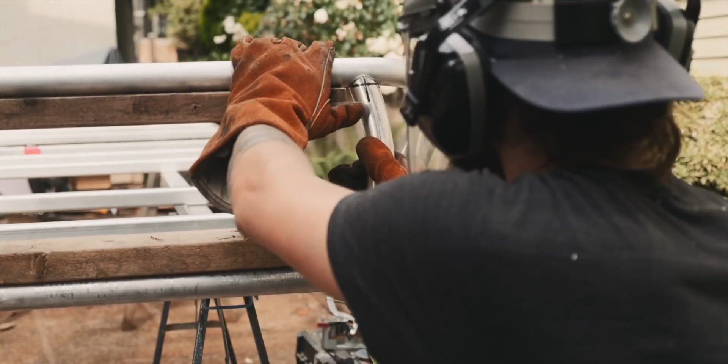Hey friend, have you wanted to learn how to weld? I think you should. I've picked up welding in the past couple of years, 3 years ago exactly, and it's my favorite skill set that I've developed time into learning, and I think it's a lot easier to get into than most people expect. At least that's been my experience. I was more intimidated about how difficult it might be and was pleasantly surprised how quickly I ended up making projects that I liked. We're gonna tackle a lot in this.

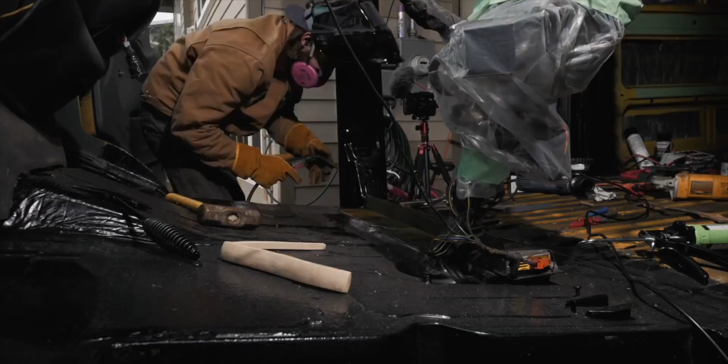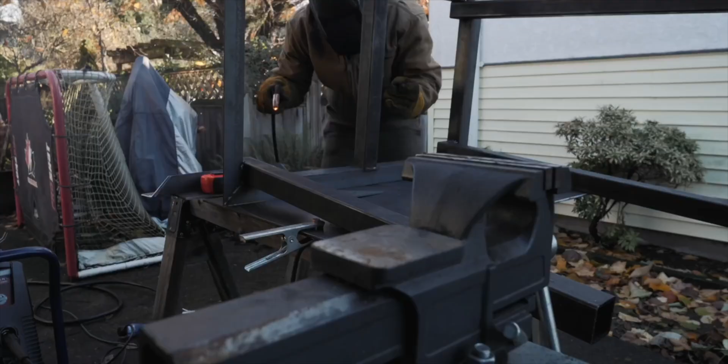And I always assumed that welding was really hard, and in order to get something functional, you needed years and decades of experience. Yes, pipeline, structural welds, those kinds of things, that craft is on a whole other level. Guys doing TIG welding, stainless, titanium, all those specialty kind of welds, yes, those are an absolute art form of a science that I respect so much, what those guys are doing in their knowledge.

But let me just be really blunt with you. Steel assembly with a Canadian Tire welder is easy. You get a bottle of gas, you get the right wire, you learn what the stuff means, you learn your settings, and assembling things with a little welder like that is very straightforward. You clean your material, cut your joints well. Steel welding is very straightforward.

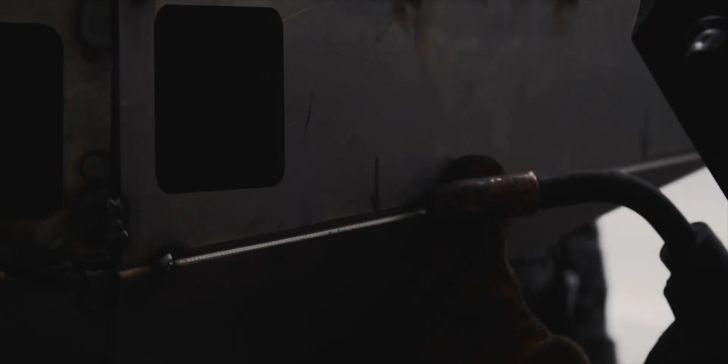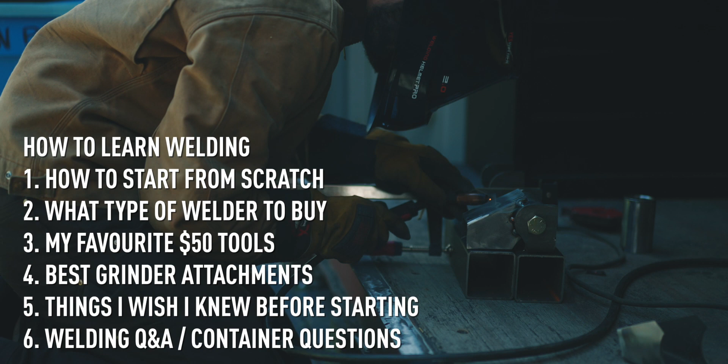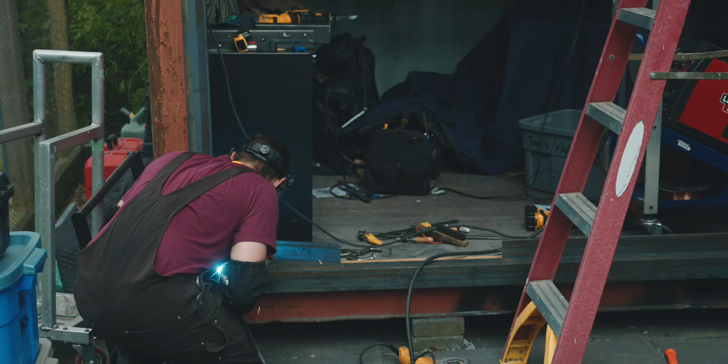So this video turned out to be pretty massive, and I'd love for you to use it as a choose your own adventure, to just jump around the different sections and chapters for whatever interests you, from the philosophy of how I approach learning how to weld, to what I think is the best welder to start on, to the little tools that I find very helpful that I wish I knew existed earlier. This is technically part 3 of a series of videos that we're making about the shipping container I will be continuing to convert into an off-the-grid capable shop.

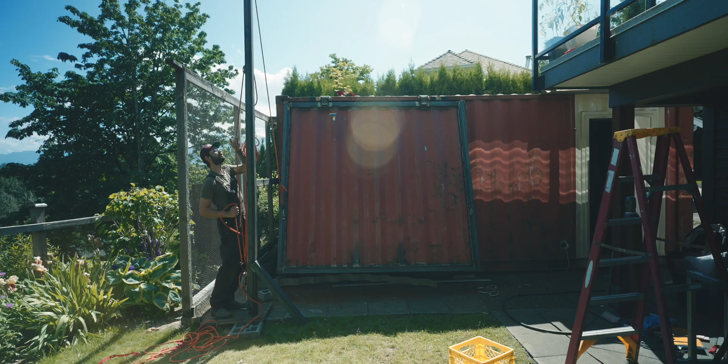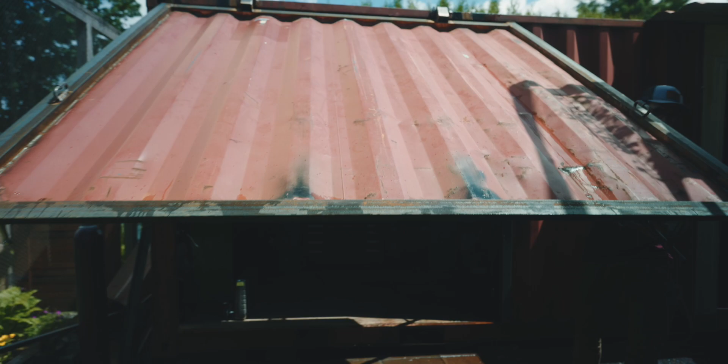If you're watching and you go, oh, that's not the right word or explanation, or there's a better way to be doing that, I can assure you this video is already way too simple for you, and you're further along than even I am, so don't worry about it. This video is not for you. And if you have any tips, please leave them in the comments, because those are always helpful. But again, I'm doing this from a beginner's perspective. I am not an expert.

The structure of this video is going to look like this. I'm going to talk through how to start, the exact tips that I would go through from not having a welder to laying your first bead. Then we'll cover a section on what type of welder I think is worth getting as a beginner that's going to grow with you for the different types of projects you may want to do.

I'll cover my favorite tools for under 50 bucks that have been really helpful for metalworking in general that I didn't really know existed, but I find super helpful. I'll then cover 7 things that I wish I knew before starting welding. This is kind of like more philosophy about how to approach learning. Then we go into a massive Q&A section addressing most of the questions that I've gotten so far on the container videos.

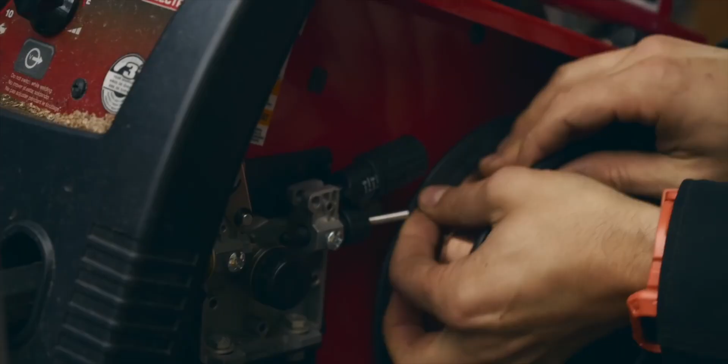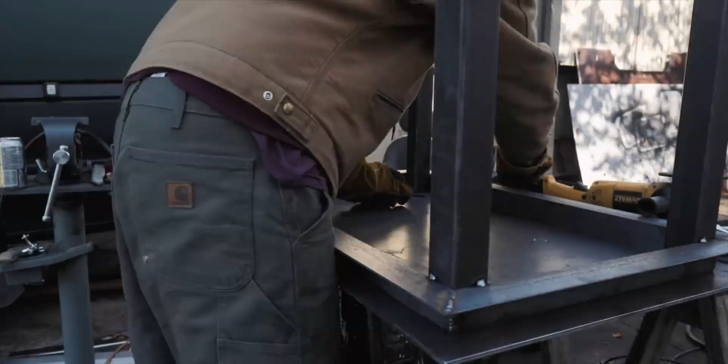So rapid fire off the top here, how would I get into welding if I've never welded before? Buy whatever welder you can get your hands on. More tips on that in a sec. Read the operational section of the manual so you know how to feed wire, work the machine, and change settings. Decide on the first project you want to build, like a table or a shelf. Buy the material and cut a bunch of practice sections to do testing on.

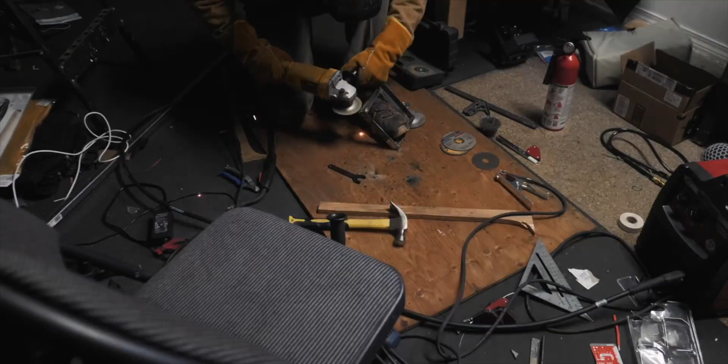Reference the chart with your machine as a starting point for the weld settings of the material you want to weld. Try to start welding. In about 30 to 50 minutes from buying the machine, you should be able to get something that resembles a weld happening.

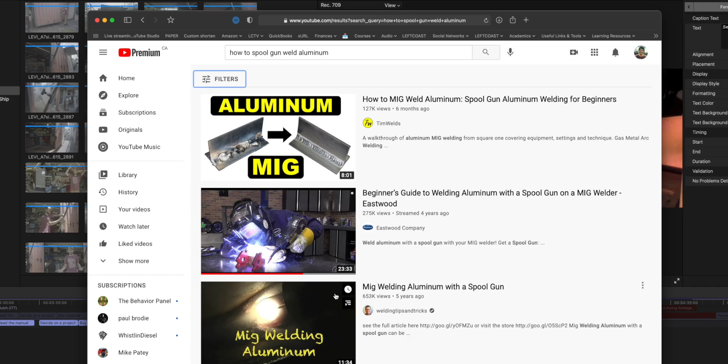See, look, this is my first weld. Then I would go to YouTube and watch welding videos that show you what the puddle of a weld looks like when you're welding different kinds of joints with a MIG welding setup. These videos are super helpful, often great explanations from really talented experts, but often filled with so much information that you only learn one or two things at a time.

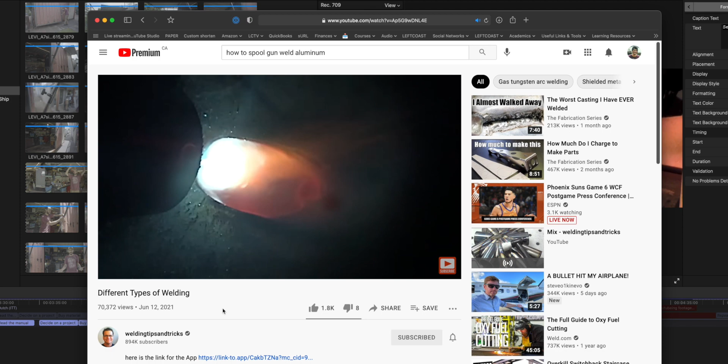Take the one or two things you learn back to your project, try laying some more weld. If you run into an issue, stop, Google the answer, try to find a solution, watch more videos, go back to your project, and eventually over time, if you rinse and repeat this back and forth, you will get closer and closer to a weld that's gonna be strong, and you should end up with the finished project.

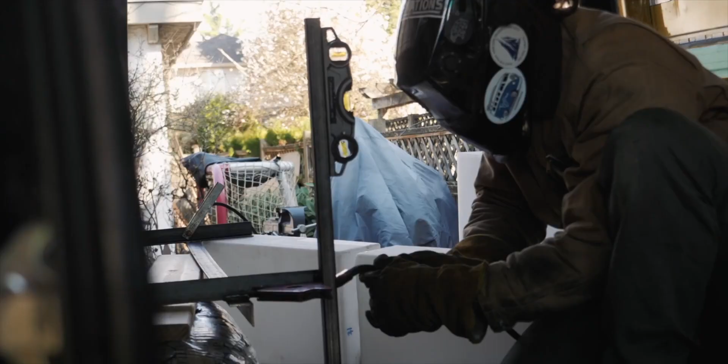Then repeat this process over and over with new projects, scaling up the size, trying different things, stretching your skill set, always searching for the answers to the things that you run into so that way you can learn more. And through all of this, I must say, respect the fact that you can get hurt in a lot of different ways if you're careless.

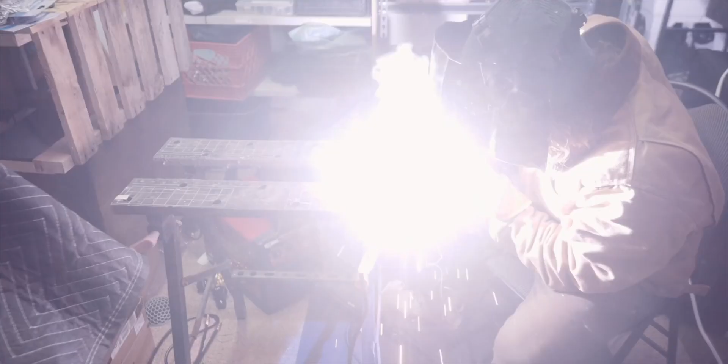Things are very hot. You're dealing with molten metal. There's lots of off gases. If you're using grinders, there's many ways to injure yourself. So respect it. Learn about the protective equipment that you would like to use, because there's just a lot of ways you can hurt yourself.

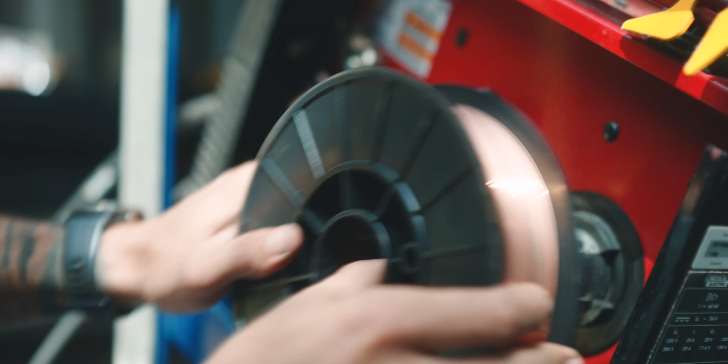From a beginner's perspective, the type of welding that I think is most straightforward and helpful to learn and will take you the furthest, I think you should learn MIG welding if you want to do steel assembly of projects like what you've seen me do on this channel. Wire feeds from inside the machine through the gun and meets where you're going to weld. So inside of here, there's a spool. It comes all the way down the hose and it comes out the end here.

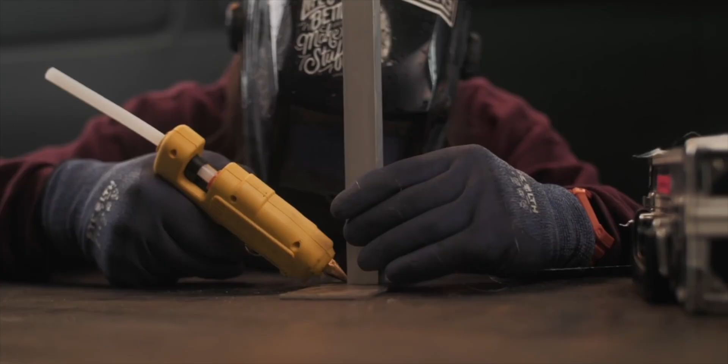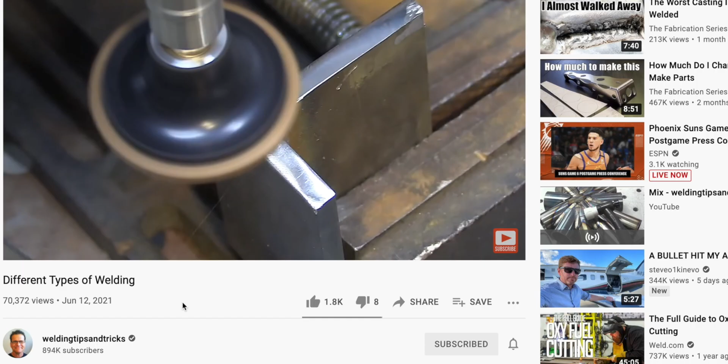Let me see if I can explain this in a simple way. When you hot glue, you're adding glue to the outside of two materials and you're sticking them together. Welding is not that. Where the wire is coming out, that is creating basically a molten reaction in your joint, and you're actually fusing the two pieces of material together. So don't think of the filler wire as just the thing that is gluing. The goal of welding is to penetrate into the two materials and fuse them together.

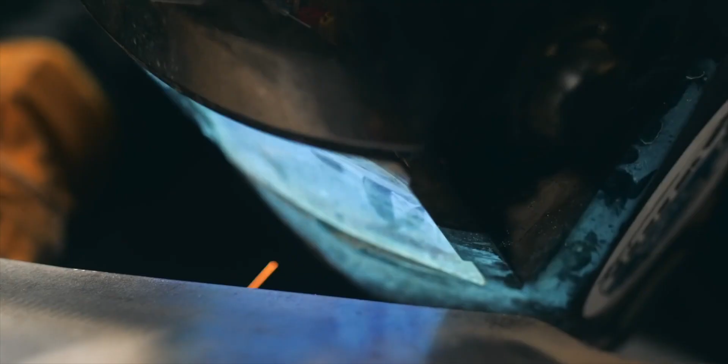But the process of MIG welding, where the wire is coming through here, allows you to learn it quickly. The intro level to learning it is very quick and you can get results fast. And then the ability to do larger projects expands with it. So all of this is assuming that the main thing you're wanting to weld together is just basic steel. That's called mild steel. This is just ordinary steel that you can get from a lot of different places, and it's one of the more common materials that people like me are trying to build together into things.

So welding together steel with MIG is what I strongly recommend, because the ease of use, the experience of it is awesome. I really enjoy MIG welding. It's quite an easy learning curve. You can go get a MIG welder from basically any hardware store. From $300 to $1,000 Canadian, you can get yourself a great machine that you can then add peripherals to make it do other types of processes.

So typically when you get a machine like this, it will come with spools of flux core wire. This wire that I have here doesn't have any shielding built onto it. What the shielding means is, where you're doing your reaction of the weld, at that site where you're fusing metals and making them molten, you need a gas protecting around that area so that it doesn't get oxidization and porosity. If there's no shielding over that delicate site, you're going to end up with a weld that is not strong, is easy to crack, doesn't fuse properly. That's not good. You don't want that.

So flux core is very straightforward. You can use it in windy environments. It's great, and you don't need gas to do it. So you can get started right away. That's a fine process to learn.

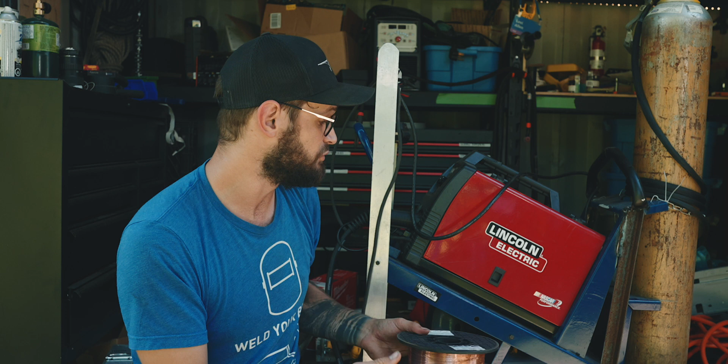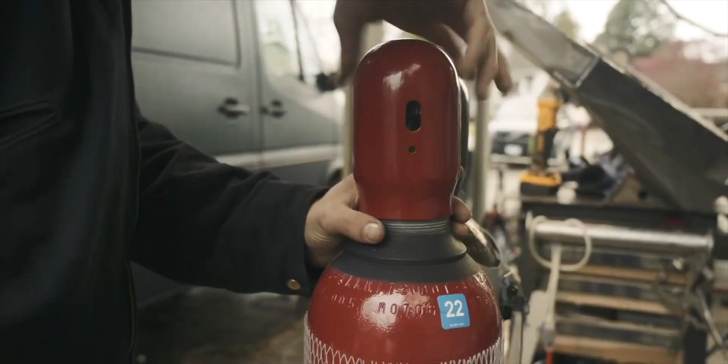It's great because deep penetration for your weld is straightforward with flux core. Flux core is fine. You might find yourself wanting to jump over to not doing flux core. Maybe you want welds that look a little cleaner or don't have as much slag on it, or for whatever reason. Jumping over to a gas bottle setup is what allows you to run other types of wire that don't have the shielding, the flux core built onto it.

I wish that I knew when I was getting into this that the wire I was going to be using most of the time is 035. I'm going to be welding mild steel. And if I get into a gas, basically I just need the argon CO2 mix for welding mild steel with MIG. And you hook that up to your system and you get a welder going that is pretty capable for doing a lot of different projects.

And you can get started without the investment into gas bottles for a lot cheaper. But if you buy a welder that is able to do shielding gas, like it's got the hookup for it, it opens up a lot of flexibility. And yes, there are more expensive machines, these multi-process machines that can actually do TIG welding as well, and these other types of welding where you're adding filler rod or you want to do stick.

And if you want to go the route where you eventually learn TIG welding, which is able to do a lot more specialty applications in metal types, it might be worth it actually to learn stick welding first, because that has a higher entry level of difficulty. But once you learn puddle control with stick, it makes TIG welding tons easier. But if all of that is just not in your wheelhouse, don't worry about it.

I recommend going the MIG route with flux core, getting a bottle of gas. Any cheap welder from any department store is going to do just fine. I don't know, read some reviews online, but basically anything that you end up buying, I think is going to be fine. Just be aware of its limitations if you're trying to go to thicker materials.

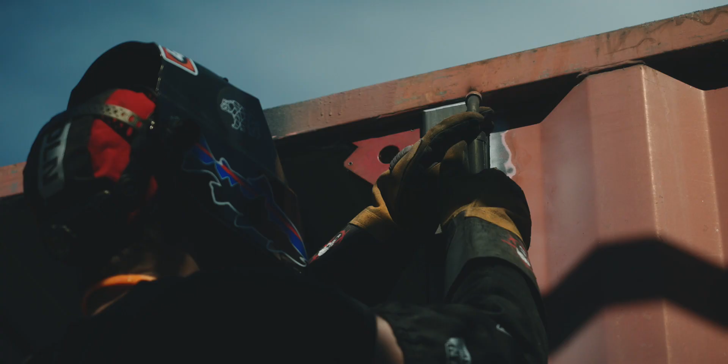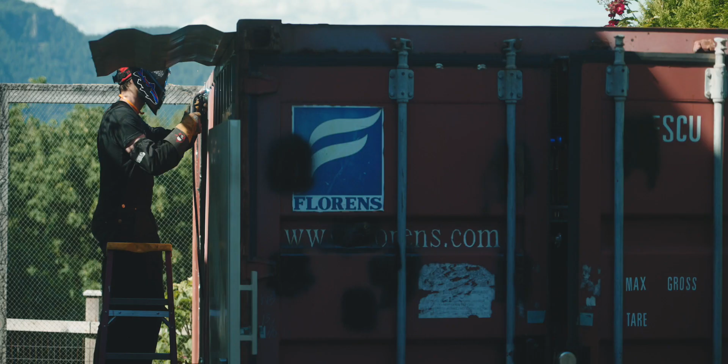Jumping over to 240 volt, that's going to allow you to do thicker metals because you can run a higher heat weld because it's got more power available. It's not just going off a 15 amp 110 circuit. You can get just a 110 welder, and that's gonna be able to do a lot of projects, and maybe that's just fine for you. But be aware of the limitations on material thickness.

So research whatever model you're considering buying and just try to figure out what's the thickest I can weld with that machine and the wire size that I can put into it. And if that's not as thick as you want to go, jumping up to a 240 volt welder is great. And I specifically went to this model because it was spool gun capable. This is still what's considered a hobby level machine.

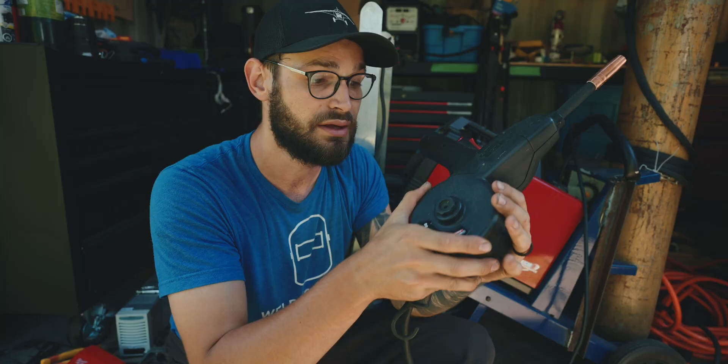So the quality of spool gun you can buy, you're limited to because of the types of connections that are on it. But the reason why you want a spool gun is for welding aluminum. Spool gun aluminum isn't my favorite way to do aluminum, but it's the lowest barrier to entry, especially when you're using shielding gas. And the reason why you need to use a spool gun when doing MIG aluminum and you don't have a push-pull machine is because aluminum filler wire is so soft.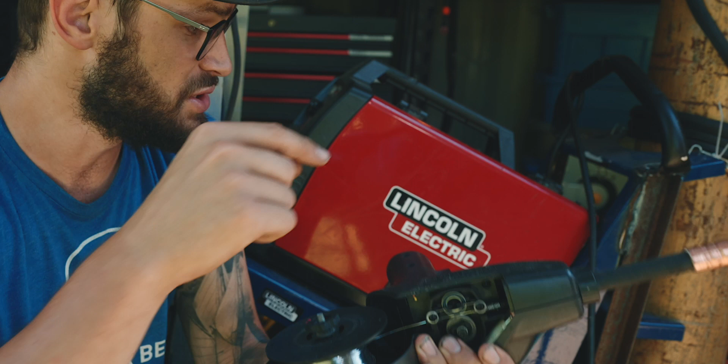So running it down the whole hose to your point of weld, that's not going to go well if you're not using a spool gun. So like this, the spool is super close to where your weld is going, so it doesn't have much distance to travel. It's not pushing it or pulling it very far. And this is what gets you in the aluminum game.

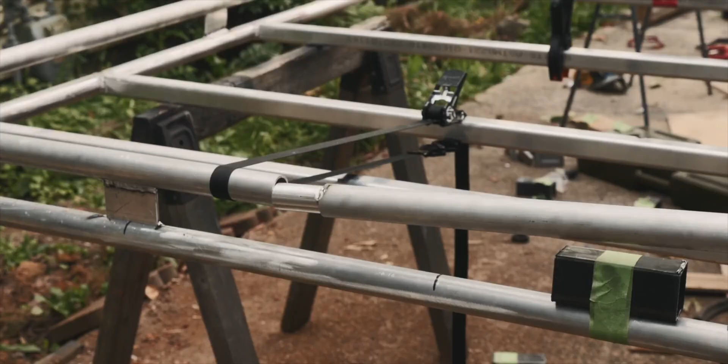And you can buy different spool guns for different types of machines, but it just so happens that the cheaper Lincoln machines are capable with the 100 SG spool gun Magnum. It's fine. It leaves a lot to be desired. It's expensive. It was like $500 and it's a lot of plastic.

But this is what got me into the aluminum game, so that way I could do my roof rack build and other things like that. And aluminum is quite enjoyable to work with, as far as the fact that you can use your standard woodworking tools to cut it, to manipulate it.

It's nice and soft. It's light. I love aluminum. Welding it is difficult, but I got this specific machine because I could attach this spool gun and get into the aluminum game. And that's kind of what's required to do that.

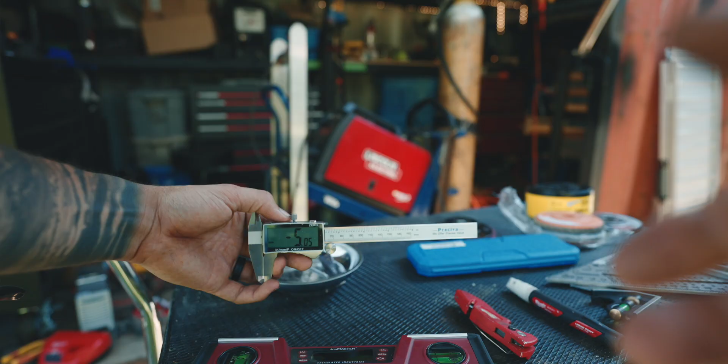I want to quickly address some of the most useful items that I didn't know existed that have really helped me. The one that I want to start with is a digital caliper that shows you fractions. I don't think in fractions very well because I'm not a carpenter, I'm not a metal worker, and I haven't lived in that world my whole life. And so when someone says that a material is 5/16, my brain has a very challenging time immediately visualizing what that thickness is.

And so when you walk into a store and you say, hey, I need 4 feet of this kind of steel, and they go, what thickness? And you're like, crap, I only thought dimensionally. That's a good time to ask them, well, hey, what thickness do you recommend? And then they'll ask you some more. That's a great time to ask a question.

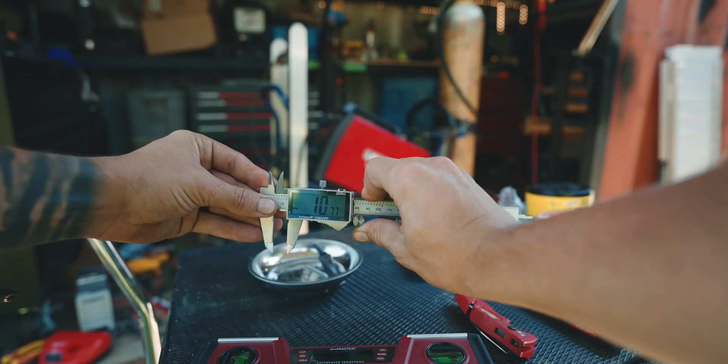But also having this digital caliper, this is just a cheap one from Amazon. It can switch between millimeters, inches, and fractions. And this is so helpful for me, especially when I'm ordering parts and I see the measurements online and I'm like, what thickness is that?

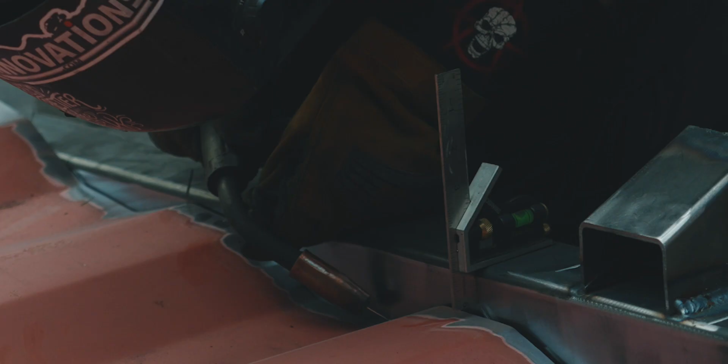Next piece that I'm really happy with is this really small combination square. I use this all the time. It just lives in my pocket. Because it has the oversized edge, it can sit nicely up on a piece of material for marking it out, measuring thicknesses and depths of things by setting it on something. This gets used all the time.

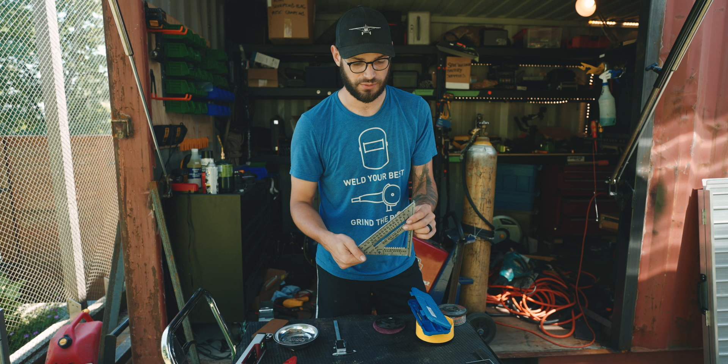I love this. Another really helpful measuring tool is just a metal speed square. This is really quick for doing lines, for cutting. It's metal, so if you're working with hot material, it doesn't melt and that kind of thing, and it can get knocked around a little bit and it's gonna be fine. But a digital torpedo level is really helpful. This is magnetic, so it attaches to the material. It'll show me a digital number, either right side up or upside down.

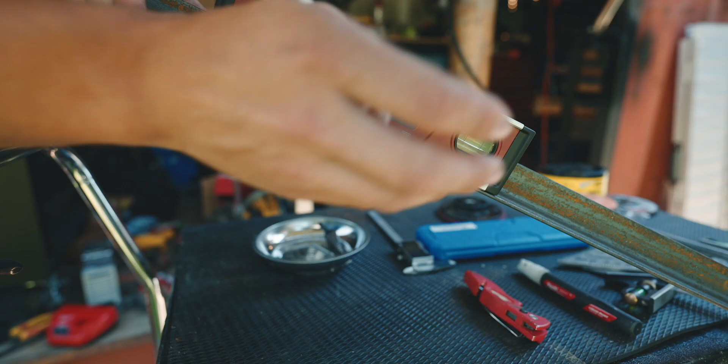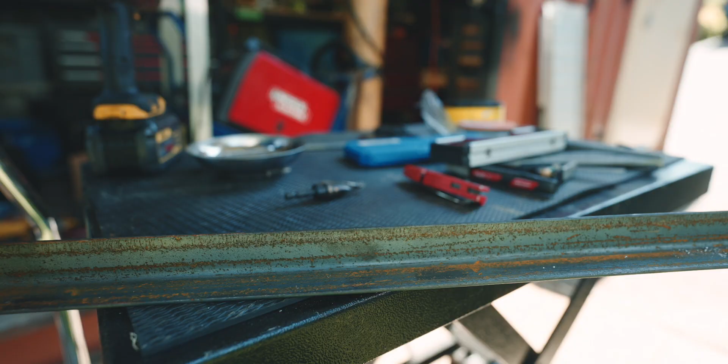Moving to drill bits. A spotting bit is amazing for metalwork. It's like a 45-degree angle and it's very sharp. It's not actually meant for making a hole. What it is meant for is marking where you're going to start drilling with another kind of bit. And it's very easy to hold it in place on the material and it doesn't wander. So I use these all the time for where I'm going to start my hole instead of using a punch. And this is just so invaluable. We use this all the time on the van project.

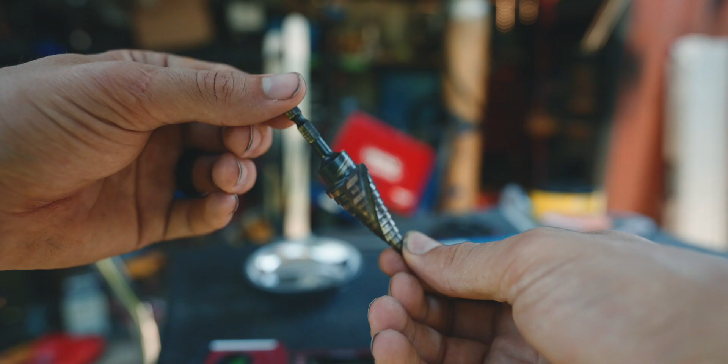Massive stepping bits. So it's got the wider diameter as you drill through your hole. I use this all the time. I really like the Milwaukee ones, especially with the hex shank. They're kind of expensive, but they're worth it. The Milwaukee ones have been my favorite, and they make making holes in metal so much easier, so you don't have to keep swapping your drill bit as you keep going bigger. Stepping bits, amazing.

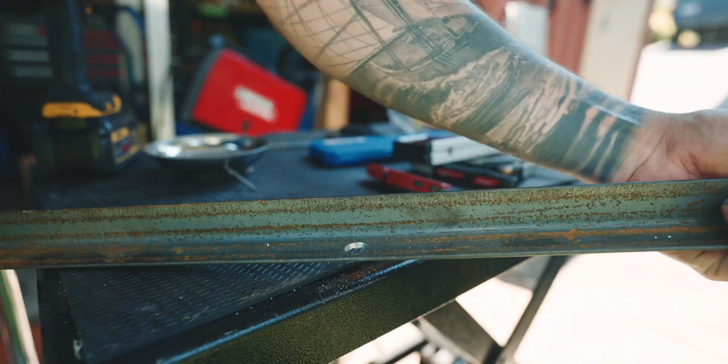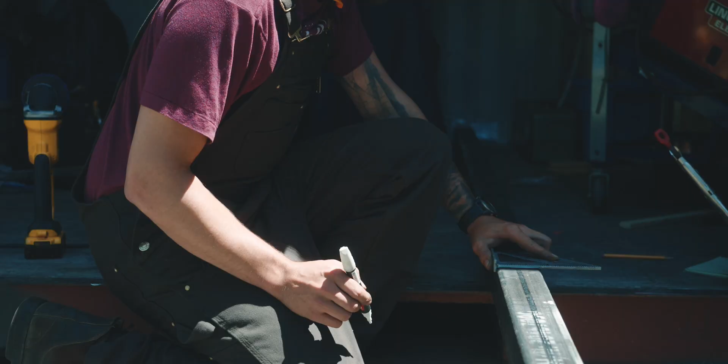For marking lines, I use an X-Acto knife. So this is just a Milwaukee fastback kind of open version. I like this because it's easy to swap out the blades because you are dulling them out if you're using them right on steel. But I'll just hold it right up to my square, come down it, and it'll mark on steel or aluminum, no problem. These paint pens, sometimes they're frustrating, but they do work well on metal. So having paint pens around is fantastic for marking out where you're going to cut.

I also find you can never have enough of these magnetic dishes for putting bits and things and doodads in, especially if you're disassembling something and you're not wanting to lose bolts. These are great.

Watching videos in other people's shops, especially before I got into metalworking myself, I never knew why they had so many grinders around. I'm like, don't you just swap the disc with the tool? Like what's the point of having that many grinders? And it's hard to describe the sheer quality of life you feel when you have several grinders for the different purposes. So as you're working through your project, you can just move from one grinder to the other.

The speed that it saves you, the joy that you feel. I'm of the opinion now that you can never have too many grinders because they are so massively helpful. When you don't got to friggin' fart around changing the wheels mid-project, it gives you an enormous sense of well-being. Grinder and paint makes me the welder I ain't. I don't think I knew how much I would be using a handheld grinder.

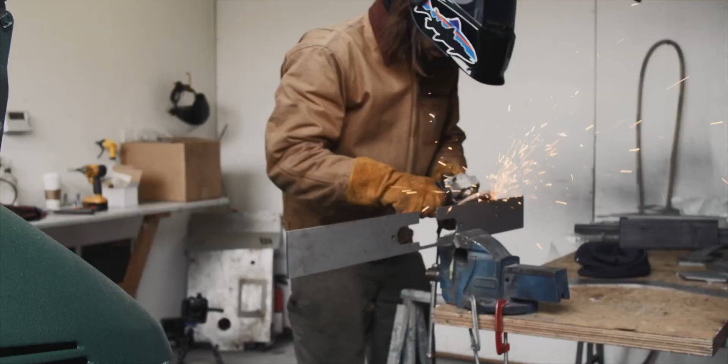They're indispensable in metalwork. I didn't know, and this is because I was a beginner, I didn't know that people used any kind of sanding tools on metal. But flap discs was what I was introduced to by Brandon from Coastal Off-Road when I was finishing my bumper build to get that nice smooth finish. And a flap disc is just worth its weight in gold. This is the most used device on a grinder when I'm working on a welding project.

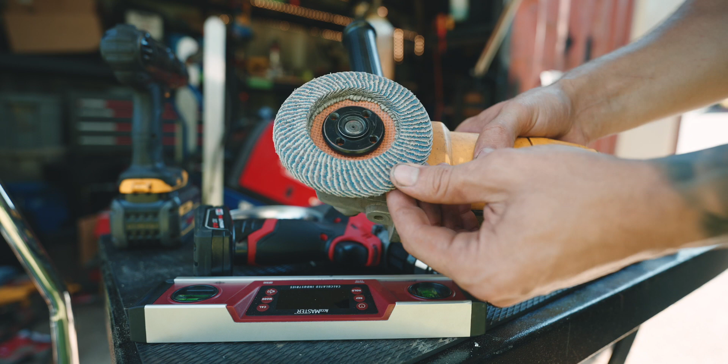I thought these big chunky abrasive discs that were just always on the grinder growing up, I thought this is what guys use for metalwork, and I could never figure out how they got smooth finishes on their material and why mine always looked so bad. I rarely use these big thick guys except for massive welds that I'm trying to smooth down quickly, but then I stop before I get all the way down and I come by with a flap disc like this. When a flap disc is well used, it starts getting a nice rounded shape to it.

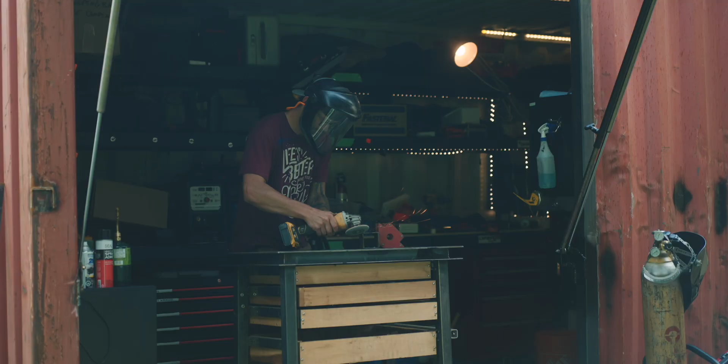And that's fantastic for notching tubing, for getting in there and making that nice smooth curve. It's really nice for beveling edges. So when you want to get a nice curved radius on a piece of steel, I really like flap discs. I buy these in 40 and 80 grit for different types of finishing, but I really like these all steel Walter ones, especially the kind that aren't thread on. I like it where the shank goes through and you actually clamp it down. When they're plastic and they're thread on, it is easy to break them off. This brand is my favorite. I buy these in counts of 10.

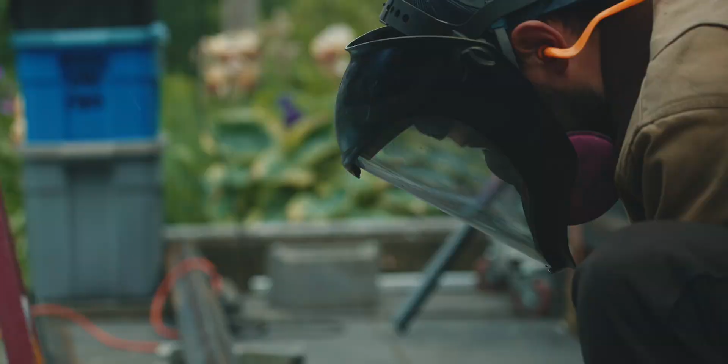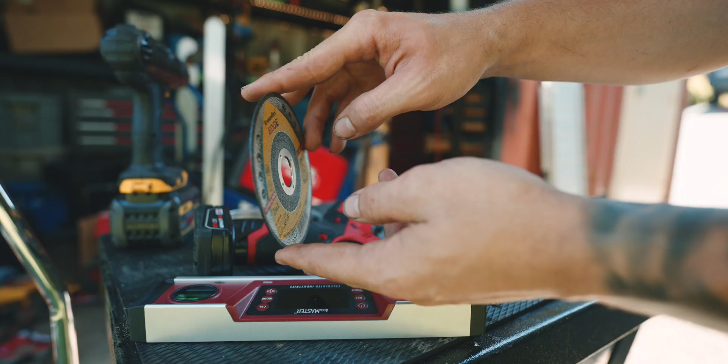These are 80 grit. Zip discs are my other most used disc on a grinder for cutting material. They're very thin, but they work amazingly well; it's like a hot knife through butter, cutting steel with them. I get the 4-inch and the 5-inch ones. These do explode. So all abrasive discs, all discs on a grinder can explode. So it's a good practice to off-center grind, like move your face away from where you're grinding. Having a guard on is wise a lot of the time.

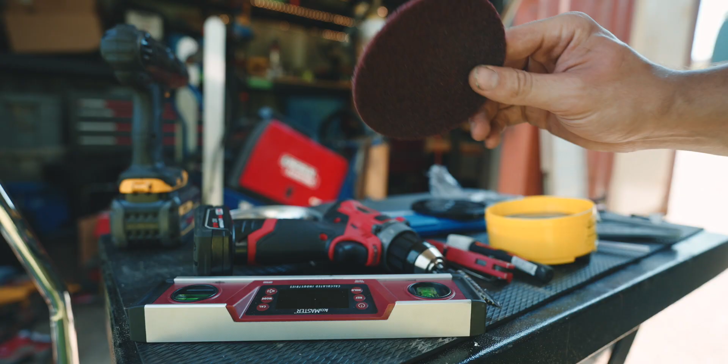For finishing, using a 3M Scotch-Brite pad with a plastic holder on a grinder. This is an amazing way to just finish and prep things for painting, cleaning, removing mill scale. I had no idea Scotch-Brite pads were even a thing on grinders, but they are so massively helpful for metal cleaning and prep and kind of just finishing off the look of your project. So getting into Scotch-Brite is a massive improvement.

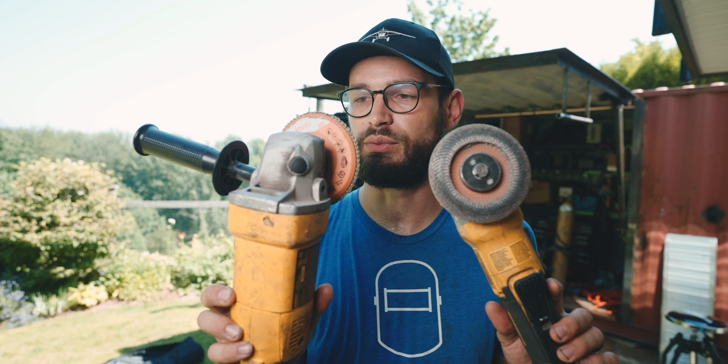I recommend starting with 2 grinders. One that's a heavier duty, higher amperage corded grinder for when you need to remove a lot of material from your welds, or you're working on a lot of steel stuff and you just need to do a lot of grinding. The higher amperage is going to just be better for heavier use applications, and because it's corded, it won't run out. And then I really, really like having a battery operated grinder for quick stuff.

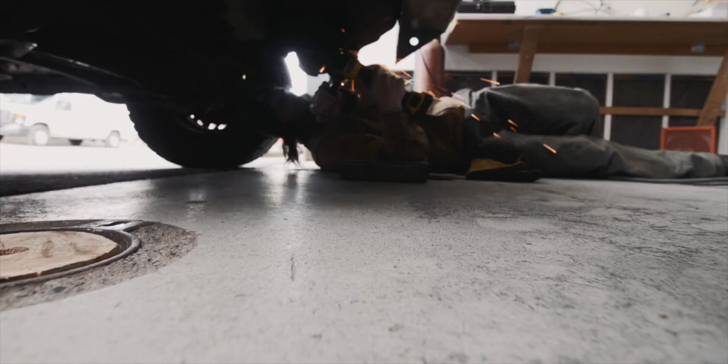This DeWalt XR one is nice because it's got a brake built in. So when you use it, by the time you're going to set it down, it's already stopped spinning. So I really appreciate that. You don't have to buy DeWalt. Just any battery operated one is helpful. Just be mindful that the battery is going to run out so you can't use it for long jobs.

I didn't actually intend to end up with this many grinders. I got these from an auction house for businesses that basically went bankrupt or closed or whatever. And you can find stuff on auction and get it really cheap. So I was after these large batteries because they just have higher capacity. And getting a set of these batteries, grinders came with it. So I started with one cordless and one corded, and now I have basically 4 grinders. The flap disc I use all the time for smoothing down the welds, getting 45-degree angles on it when I'm prepping a joint to be welded.

This guy right here is a new disc to me, but it's primarily for removing paint without much of the metal material. So that's kind of nice, because even if you use a sanding flap disc and you're using that to remove paint, paint will get clogged up in the flap disc. And also, if you remove too much, then you start to take away your actual material.

So I like these guys right here. It's actually very functional. I'm quite pleased. I bought a 4 set, and I'll definitely be buying more of these for just removing exterior paint.

The first main thing that I wish that I had known before I got into welding was I'd spent a lot of time researching how to get around welding. Maybe you've done something similar, like how to weld aluminum on the cheap without a welder. If you've found yourself running into how to find shortcuts around welding, I personally wish that I had realized sooner I should probably tackle learning how to weld.

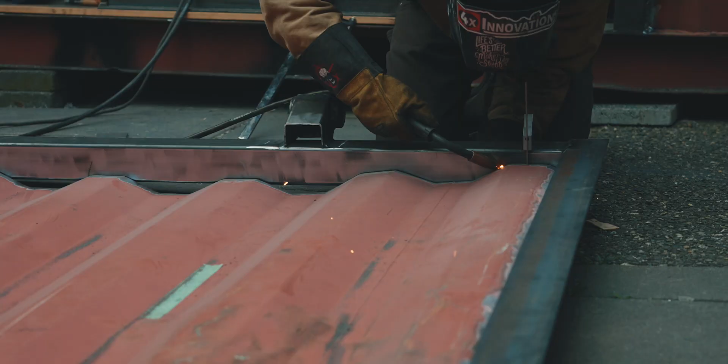And now that I have started, I'm finding all these different ways to use welding in projects to make them better. And it's just one of those things that if you're trying to find shortcuts around welding, you're probably the kind of person that should go out and buy a cheap welder and start welding, because it's easier than you might expect to get usable results quickly.

Lesson number 2, just because I'm not going to be an expert at it overnight, or maybe even ever an expert, that doesn't mean there isn't lots of benefits from becoming a beginner. I think that's the beauty of metalwork. Being a beginner at it yields a lot of positive results.

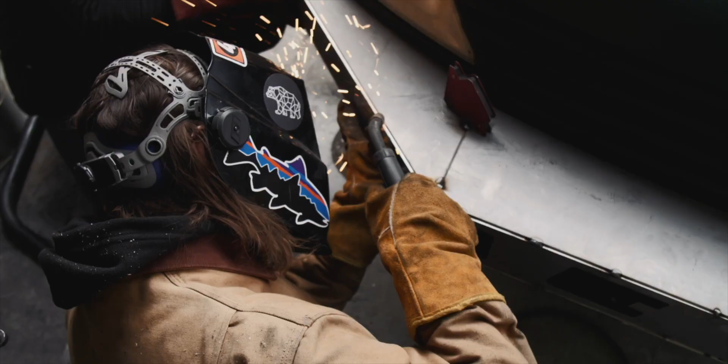And metalworking is this thing where it's like a mixture of chemistry, physics, engineering, and just elbow grease to finish a project. And the problem is that there's so many things that you can learn. There's an unlimited ceiling of things to specialize in and to get more knowledgeable about in different processes. And that can be intimidating, because then you think it's not even worth starting.

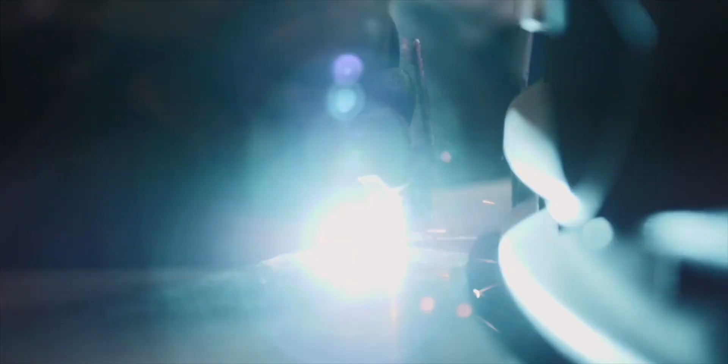But I think of it kind of like, if I haven't gone out and done a wilderness first aid course, or if I'm not going to med school to be a doctor, is it not worth then me learning how to properly care for a small wound? It's one of those things, right, where learning how to self-care a small wound is a really beneficial skill set. You don't need a wilderness first aid course to do it.

You don't need to be a doctor, and the amount of benefit that you can experience immediately from proper wound care on yourself is immense. So that's kind of my philosophy around metalworking.

So that leads us nicely into thing number 3, and that is, if you're gonna get into welding, if you're gonna go to a department store and buy a quick little welder to start with, if you're gonna go down that road, embrace not knowing. And what I mean by this is, okay, so this is multifaceted. The local welding supply shop is going to be way more of a friend than you'd ever expect.

So in most towns, if there's shops, if there's things getting built, which is most places in continental North America, unless you live out in the boonies, there's going to be a welding supply store, a place that you can fill up or exchange bottles of gas. And where you exchange bottles of gas, there's often welding supplies like nozzles, tips, wire, those kinds of things.

I would recommend, if you're going to go out and buy a welder, before you even do that, go to some of these shops. In your area, there might be 3 to 5 of them. Show up there, walk up to the counter, don't go during the busiest hours, and express where you're at in your journey. Say, hey, I'm just getting into welding. This is what I want to do with it. What advice do you have for me as far as bottle ownership, the process of getting into welding?

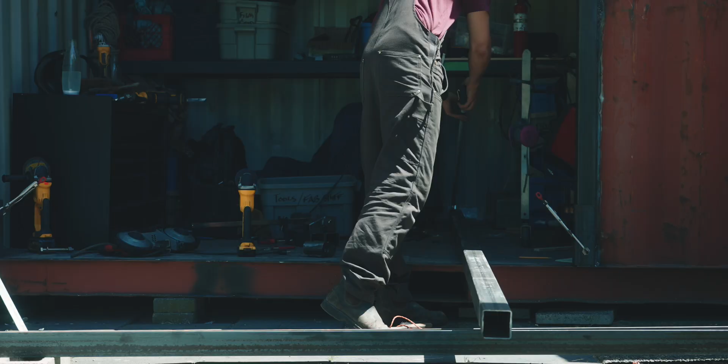Lesson number 4 is a lesson that I'm still learning painfully. And it's just that so much of building things out of metal is the measuring, cutting, and designing. That is a vast majority of what's going to end up with a final result that is good. So when you're getting into it, it's a good first project to try and make like a cart for your welder, or a bottle holder, or a table to weld on. Those are good first projects.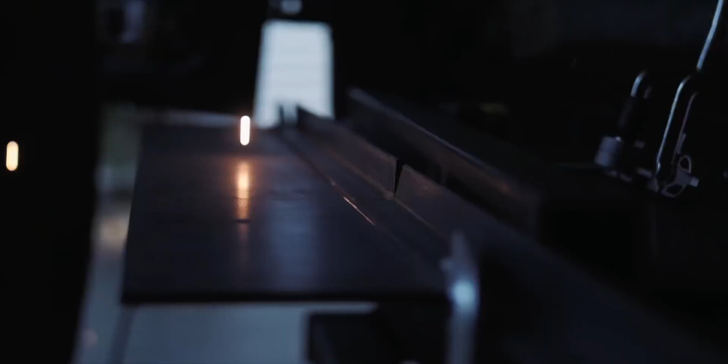And the thing is that you're wanting to weld because you're learning how to weld. And so I recommend cutting tons of pieces of metal to lay beads on and actually practice the process of welding, because you need to spend a lot of time on your machine to get used to it and how it behaves and the sounds to listen to. More on settings and stuff later. I'll talk about that in a sec. But you expect, because you're learning how to weld, so much of what you're doing with metalworking will be welding, but that's such a small fraction of what makes a successful project.

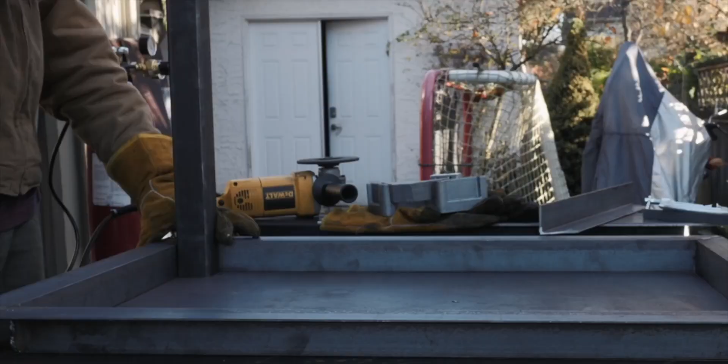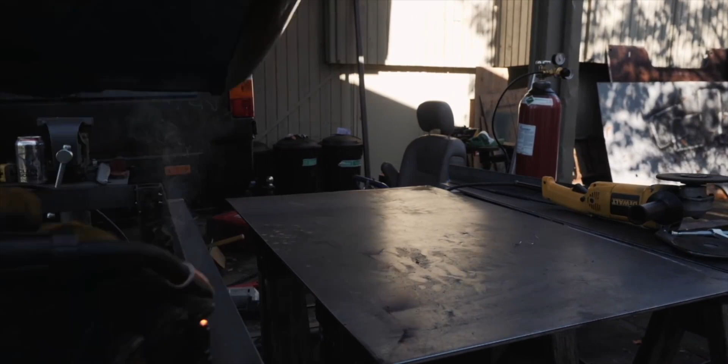And let's say your weld quality is only 3 out of 10 or something. You can get a functional built thing with a 3 out of 10 quality weld. You don't need a perfect weld if you're not doing some structural specialty application. You can have porosity in your weld on your table and it's still gonna hold together, and that's okay. And that's where so much of what makes a nice finished product in the fab cobbling world, where you're just kind of throwing things together on a whim and figuring it out as you go, comes down to the attention to detail with the cutting, with the measuring. So refining those skill sets and being patient.

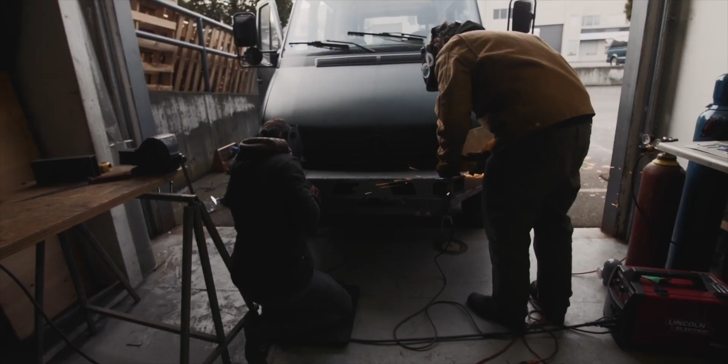In the learning process, there's an urgency to go quickly, and there's a standard of how you want things built that seems way higher than you're capable of. And somewhere in the middle there, you've got to arrive at projects that you can tackle to get that forward momentum and to kind of taste that addictive feeling of accomplishment when you're done something. But I can't recommend enough spending more time thinking through design, measuring well, cutting well, all of those things. If you slow down in that process and really just embrace that that's a majority of metalworking, you're going to have a better experience overall.

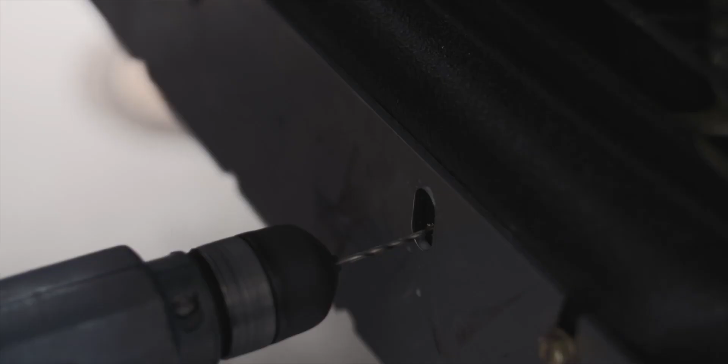Okay, the 5th thing is one that I feel that I was proved right with the process of learning metalworking, and that is embrace your learning style and just press into it. So for me, I'm a mixture of asking tons of questions of someone that's in person with me. So I love that tactile experience of a real human that's right there that I ask questions of, hands-on experience, and then deep diving to resources that are available online. So that's kind of my mixture.

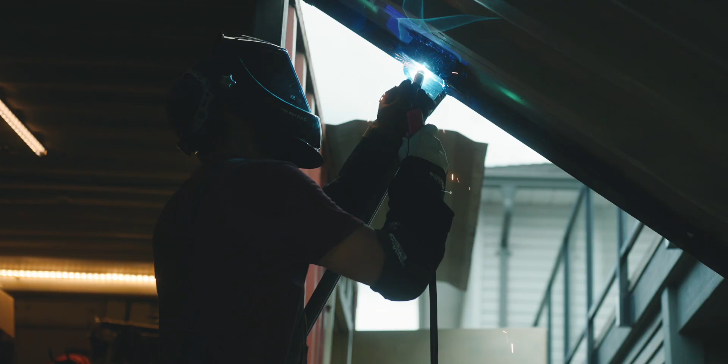I want to tack on 2 more quick lessons here that I thought of as I was talking before I move on to your great questions. One of them being the massive importance of great penetration with your weld without worrying about stacking dimes with your MIG. MIG is the process that I typically do, where wire's coming out the gun. I talked about it at the beginning.

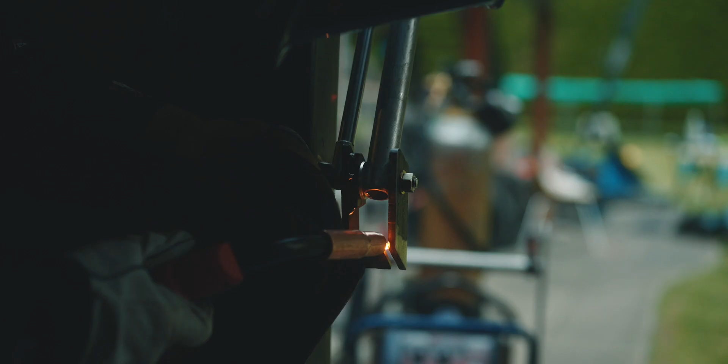It's easy to want to get welds that look like what you see people do typically with a TIG setup, like the stacking dimes look, where it's those nice little sections just stacked up like scales, and it looks so beautiful. When I was learning, I wanted to imitate that with my MIG setup. But what I didn't know, that by doing that, I'm spreading out the puddle in a way where I'm wrecking my fusion.

So this is something that takes a while to start to get more familiar with, but I would strongly recommend getting familiar with the best push process shape to do with your weld that's going to get the best penetration for your specific joint, and just really focusing on getting good heat to the weld, good fusion, instead of good shape and prettiness, because prettiness with a cold weld is bad. It's not going to be strong.

So one of the things I wish I'd started doing earlier when I'm doing my test welds on a project before I finish the assembly is, when I do the weld, take that and put it in a vise and hit it with a hammer a bunch of times. If the weld cracks off easily, that's bad. But if your material starts to bend and twist around the weld, and the weld is behaving as if it's an extension to the material itself, that is a good sign. That means your weld is heading towards a direction where it's actually adding a lot of strength.

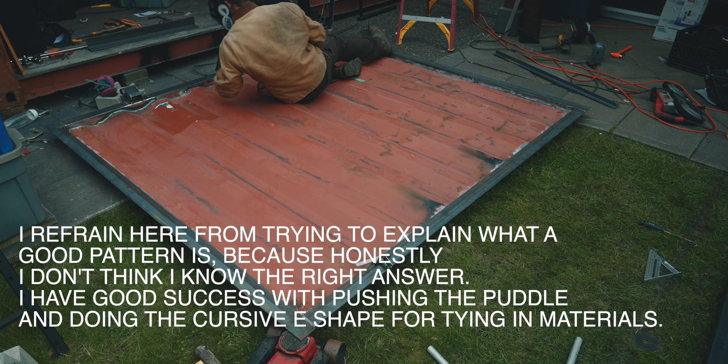But if that weld cracks off, if it's basically not melting into the material base that you're welding, bad, bad, bad. So don't do stupid, funny patterns that are ruining your penetration like I was. Focus on a good pattern with your MIG gun, and it's going to get you a lot further. Unless you're just closing a gap and using it as caulking and it's not structural. Sometimes doing big dimes is the easiest to close the gap, but that's another thing.

The other final tack on lesson here that really applies to some of the questions that I'm going to get later about how did I learn how to build things and what materials to get. Get familiar with an online store so that way you can see the different material types that are available. Like in the woodworking world where there's 2x6s, 2x12s, 2x4s, different sheets of plywood at different thicknesses, different plywood types, the same things exist with metals. And if you're like me and you're trying to picture how to build something in your head and you don't know what kind of metals are available to build that thing, it can be very intimidating.

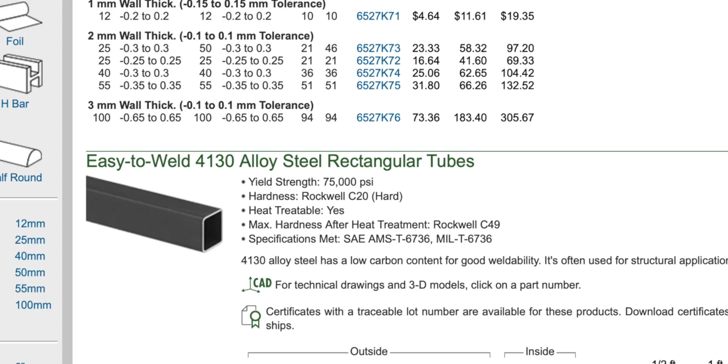So before you even walk into a metal store, go to onlinemetals.com, go to McMaster-Carr, click on the different types of tubing. And what I love about McMaster-Carr is that for the different metal types, they'll tell you what those properties add and benefit. So, hey, this type of alloy is very easy to weld, works for high strength applications. It's got this PSI breaking strength, and it'll describe it to you. Getting familiar with materials that you like working with, using a website like McMaster-Carr is very helpful.

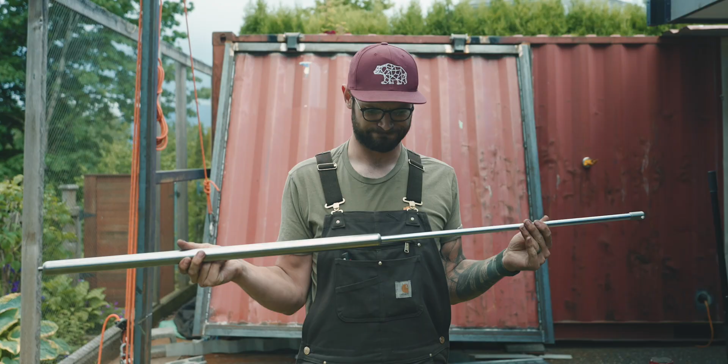That's where I sized out the gas struts to order for this sized application. That's where I found things like T-handle latches. I didn't even know those existed for me to use in projects. So if you can, actually get a McMaster catalog to look through and see what kind of parts can I use for building things, because what's on the shelf at Home Depot is not going to be everything that's available, and finding out different ways to build things is very exciting.

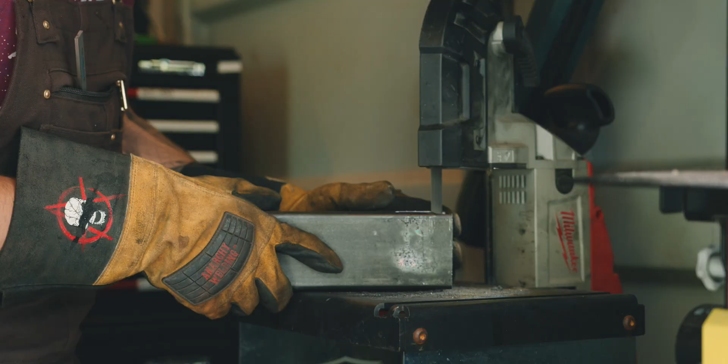Top 5 starter beginner power tools. Just bought a 20-volt drill impact set now. I want to build my garage, build out more. It's tough because it really depends on what your project is and the use case. One of the things that I'm really glad I invested in early was a deep cut bandsaw, the handheld kind for cutting metal, and then getting a Swag Off-Road table. It's a company that makes a table that converts a porta bandsaw into a vertical bandsaw. And that investment alone was a lot of money. I can't remember, but it's been so worth it. That thing cuts metal like butter, works very, very well. I use it all the time. It's nice, small, and portable.

You can't argue with having grinders. They're really, really helpful for metal prep. Getting a mask that you like is very helpful. I wish I had gotten some sort of belt sander earlier. You don't need a fancy metalworking one to get started. I just have a Ryobi one from Home Depot. That was $100 with just 80 grit sandpaper. That's very helpful when you're making small brackets and stuff for quickly prepping those edges or rounding those edges.

Would you recommend learning from YouTube, a friend, a workshop, your videos? Learn from YouTube. That's what I did. I paid attention very closely to watching other people weld if I had a chance to, but oftentimes there's just so much to learn.

So that back and forth process of why is my weld behaving funny, watching a tutorial that shows one of those really nice shots where you can see the puddle, and then going, oh, that's more how that should look, and then coming back and doing it.

So it also helps develop your ear with MIG welding. There's a specific sound, like a sizzling bacon sound, if the weld is going well that you're looking for. And once you start to get a sense for what that sounds like when you're watching videos, it gets you familiar with that sound. So I highly recommend learning from YouTube. It's very effective.

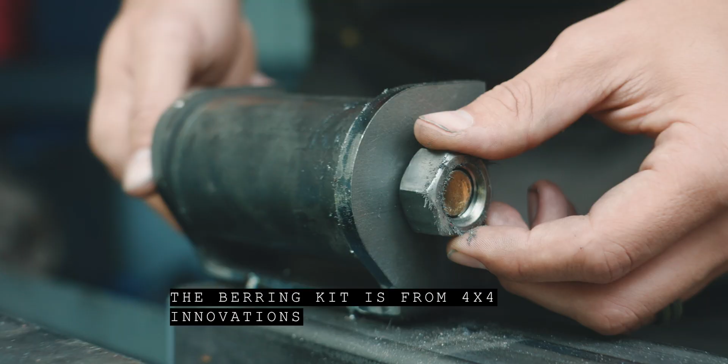This is Killer Levi. Details on the door struts would be great. Also, what kind of hinges? For hinges, I used a housing and sleeve assembly that was actually made for rear swing away bumpers. Like, it's a Weld Together kit, and they had all the pieces. I bought one of those for a bumper I was going to build for the van, but I'm now building the rear bumper out of aluminum, so it was kind of useless. And I was just sitting around and I was thinking, oh, I could probably use 2 of those for the hinges here.

Struts from McMaster-Carr, using their sizing guide and weight application. The struts are actually oversized. So one came with enough push force for the whole door. So I had to release gas to do this door, that kind of thing. That's the info.

Becky and Chris is talking about, I'm pretty sure this is Becky leaving the comment about the detail shots to help understand exactly what's going on. And Becky and Chris do renovation videos as well and build projects.

And it's always a struggle as a creator making a build project video, because you're not sure if it's worth making it more tutorial, teaching-esque, or more just showing the story. And sometimes you're learning it as you're going, so doing the tutorial actually isn't worthwhile. So that's why I'm making a video like this, where I can try to share some of the stuff that I have learned, but I'm not trying to overstep where my knowledge is.